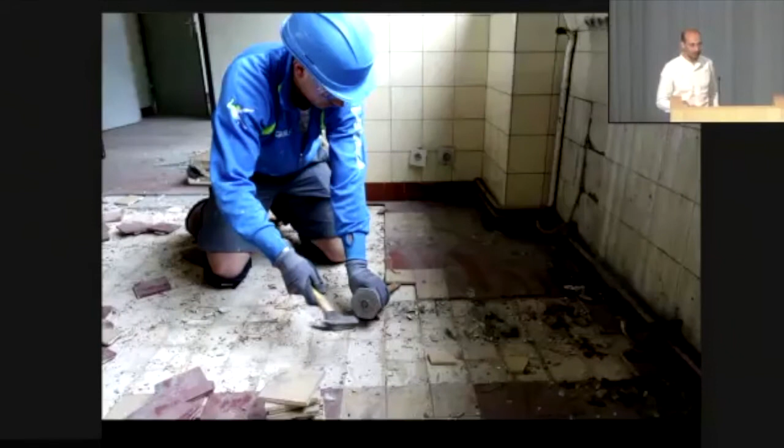What we see in the poster is ceramic tiles that have been reclaimed and reused and put into a publicly funded project of a series of apartments. That feels like something not common, not easy, challenging, and raising a lot of questions along the work Rotor is doing.

For those tiles to be in the poster means they have been reclaimed and recovered, which means a decision to collect them had to be made in this space where there is dust, there is graffiti, and decision makers had to be there, or close enough, to make that decision.

Once you take that decision, you start to collect tiles, but if you look carefully, you still have the cement mortar along the edge. You don't have a product ready to use. You just start to have something.

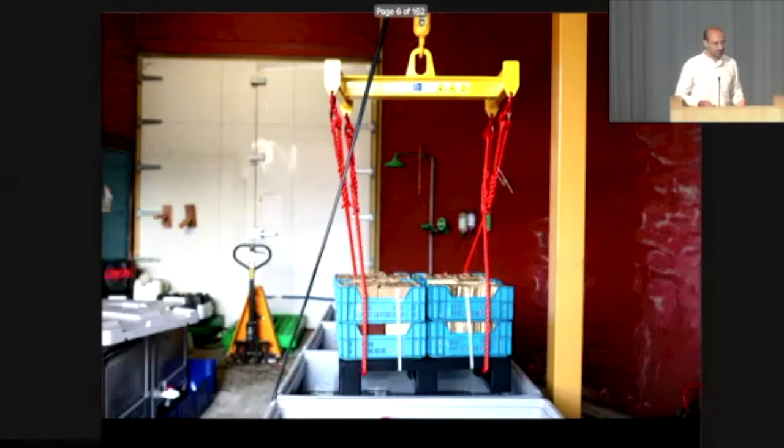The next step is a process we do at Rotor Deconstruction, but other people in the world do it too. It's basically bringing them into a bath with a soft acid, acetic acid, vinegar, which dissolves the cement. Then you clean them with high pressure water cleaning, using recycled water, by the way. But now you start to have a project.

Then it starts to be interesting. You look carefully at the product and you can recognize information — it's a Cérabati, a type of product still produced today, that has a market value. But it's also a product that comes with its own history, its own documentation, its own culture, and that starts to be something else in the process.

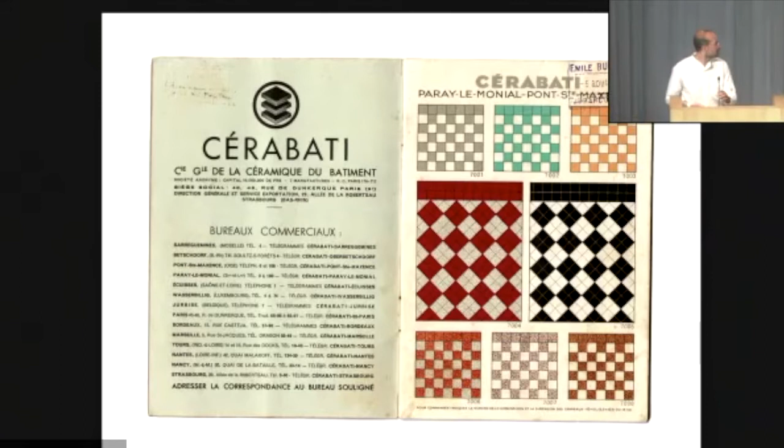That was the moment that started to be impressive and satisfying for us — it was laid and put into place in a new construction, a new project that had gone through this whole process. Maybe the feeling of scalability is part of our satisfaction. The presentation by Kerstin just showed a lot of materials that reach this same point.

And that was kind of the poster.

Maybe this echoes the work that Rotor has been doing under the umbrella of Opalis. Opalis is an inventory of the people who are already making a circulation of construction material, doing this kind of circular economy. For all of these families of material, the same story already happens. It's already there today in this world, and that was something interesting for us.

Since 2010, we started to check where and how it was already registered, inscribed in our real economy, that circular economy was happening. Because we had the feeling that even though it's not in the city center, and maybe there are small actors, they have a very huge, very real, very material expertise. There is something that is not about information, it's about the weight of architecture and materials.

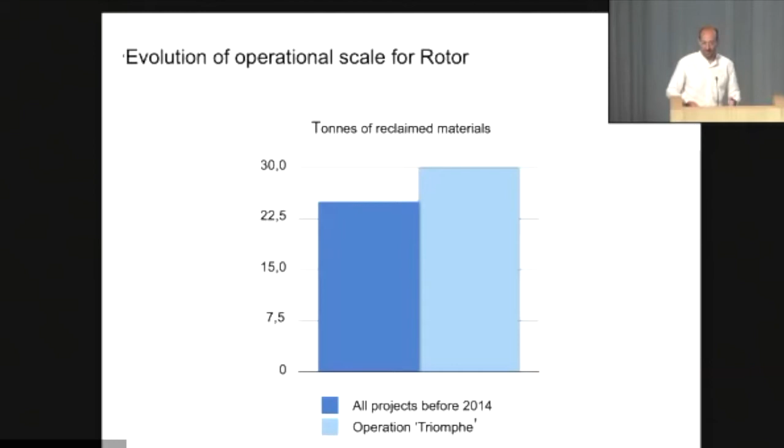The impact, as Kerstin just said, is actually significant. On this building, which was more or less our second project, we calculated the environmental impact of what we could collect, which was still the low-hanging fruit from one operation: 30 tons of materials. We used Dutch reference data at the time, since many different references are possible to use for this. At Rotor, we don't rush the translation too fast, because it's not our goal to produce a big or small number, it's just our goal to make it happen and to change things around us. The impact was equivalent to 70 square meters of photovoltaic cells over 25 years, from just one small operation in the few days before the stripping of the building.

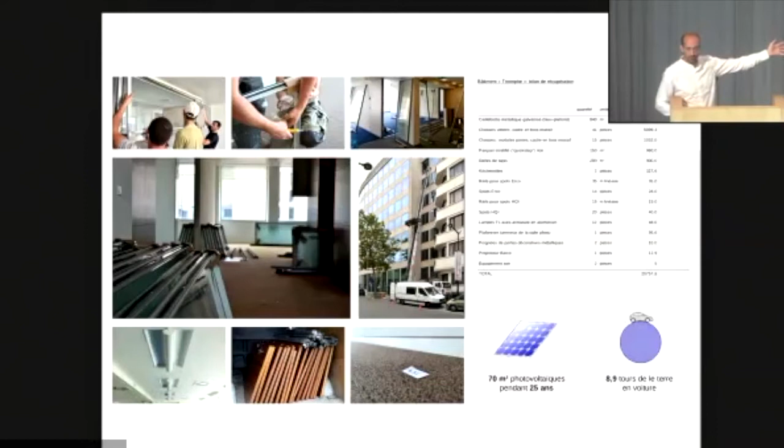When we look at it, this '25 years of photovoltaic panels' equivalent became a high point in the communication of the building owner, which is the biggest building owner in Brussels, or one of the main ones. We all know we had this communication: we have a plan for photovoltaic panels on our building over this time. And they started to understand. It's nice to see that in their communication now, they mention that following the collaboration between Befimmo and Rotor, 30 tons of building material were recuperated. As a listed company on the stock market, they need to publish an annual report every year, and we noticed that the collaboration with Rotor came before the photovoltaic discourse. Things are slowly being understood.

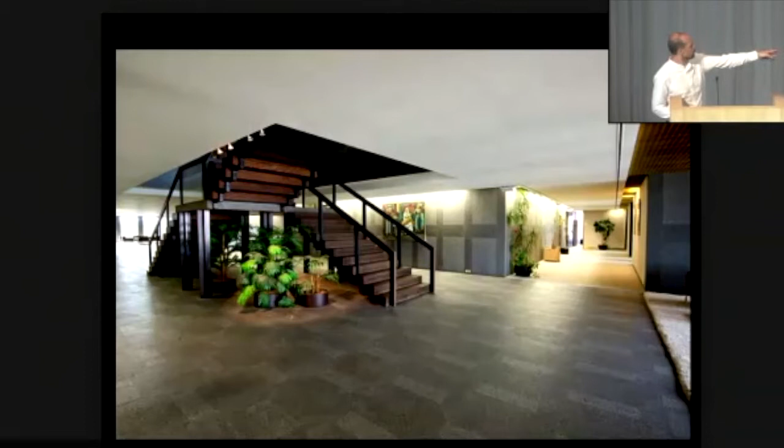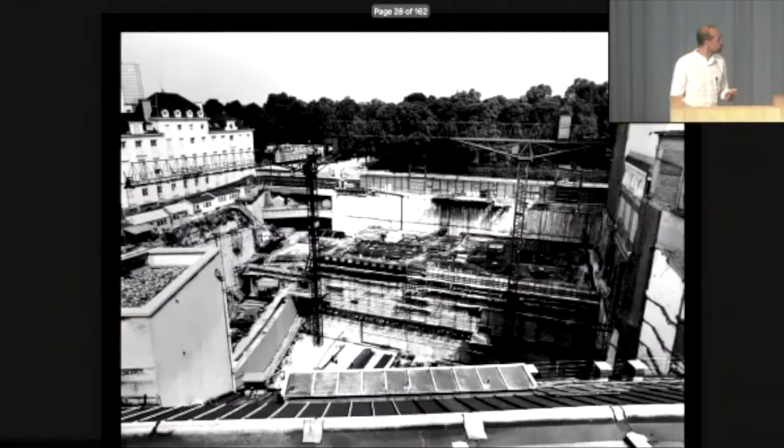Since we're speaking to architects and professionals here, I also want to say that very soon after those first operations, we were invited to assess and collect materials in a building in Brussels, the headquarters of a very prestigious bank. When you go inside, you see very beautiful granite designed by a known architect, Jules Wabbes, and precious wood on the stairs and more. You say, okay, this is definitely worth it. So we started to rent a warehouse and equip ourselves to be able to do that. There was also a beautiful false ceiling on top, and it was worth doing.

But you have to understand you don't go into that job just because it's inspiring. With this building, there are actually 6 floors below ground, a metro tunnel running at the 3rd floor below, and it's below the water level of the city. So if you make something wrong, before you know it, the pit would be full of water. You have to be able to read construction documents, do the reverse engineering, and organize with the people in charge of the operation. It really felt like high-level architectural work we were touching here, and we were very happy to have architecturally trained people surrounding us at Rotor.

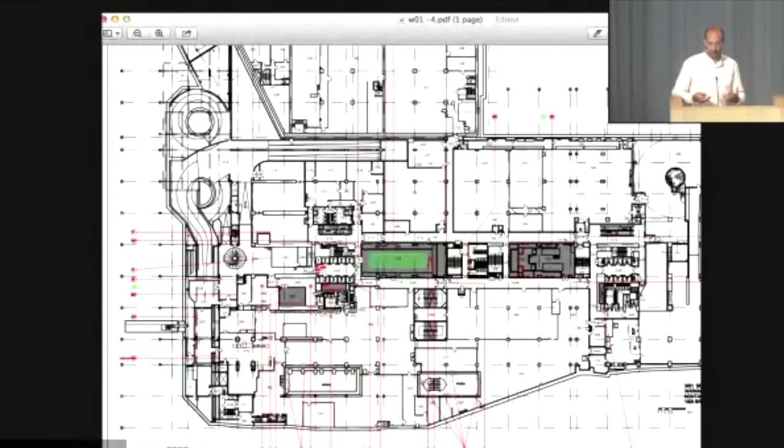You also have to be able to read the concrete quality or the load capacity of the building's floor, because when you stack the granite stone we saw before onto a pallet, you quickly have more than 500 kilograms per square meter. So you cannot just put a pile of stone on a cart and go — you have to take them 5 by 5, or choose the right path. All of this comes into the reverse engineering operation.

You also have to be competent and have the discipline to understand the risk, like asbestos marks in the construction. You want to know the safety measures and not collect materials close to a risk, because there's no interest in saving a stone at the cost of this kind of danger. It means that colleagues here at Rotor, all of them, might be giving lectures one day, in situations you wouldn't expect them to be dressed like this, but we need this kind of mindset to engage with the field. We do the job from those positions one day and from a position like today, and it implies a lot of this.

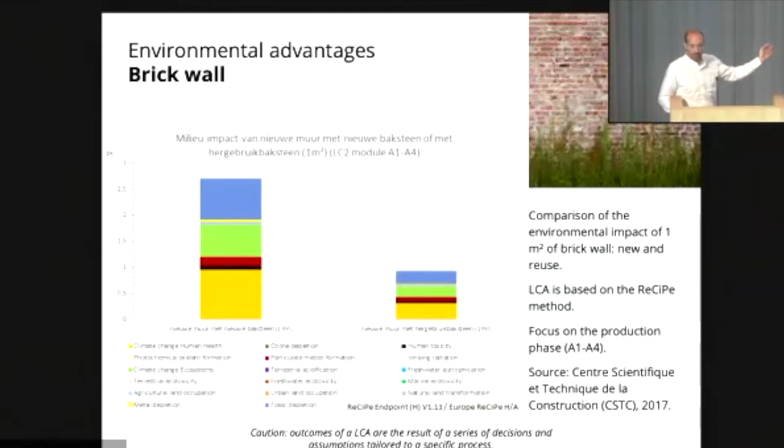All in all, the story is kind of integrated in the current narrative about circular economy. It's something that is there. We are very often invited in relation to this subject. We have a kind of table and information about the validity, the assessment of the relevance to do this for several materials.

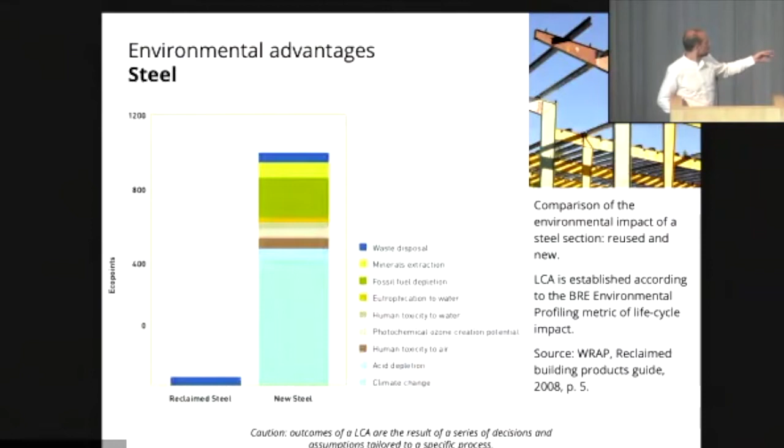For ceramic tiles, the new ones, the reused ones, for reclaimed steel, it's a huge impact. There are kinds of guides for the quick wins where you can make savings in the project. There are also informations about the distance impact in comparison to the production site of the new materials, so that you can evaluate it.

Up to that distance, it's relevant to make it with reused material, which is for aluminium extremely high. So you could take reused aluminium 12,000 kilometers away and it would still be better. And probably your new aluminium is also produced very far, so you can add that up.

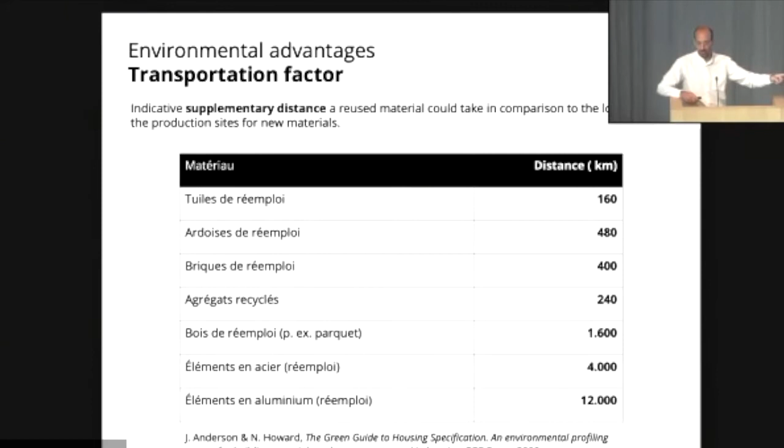And we work on that. We have a group of people, or sometimes it's the same people, but it's one branch of Rotor doing research and collecting the experience on that.

We have two documents that are at the draft version now within the FCRBE, so facilitating the recirculation of construction material. We have two guides that I will also share with you as a kind of tool, maybe for surfing around beyond the restrictions of this year.

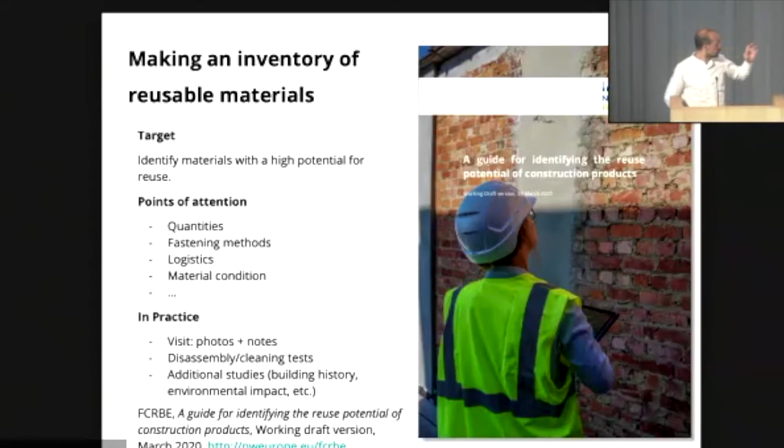One is a guide for identifying the reuse potential of construction products. It will be the final publication in a few months, but the draft is already published and available.

And we have a second guide that was done over the last three years for facilitating the integration of reclaimed building materials in large-scale projects and public tenders. So it covers strategies, approaches, problems that are raised, and for which ones there are strategies or possibilities.

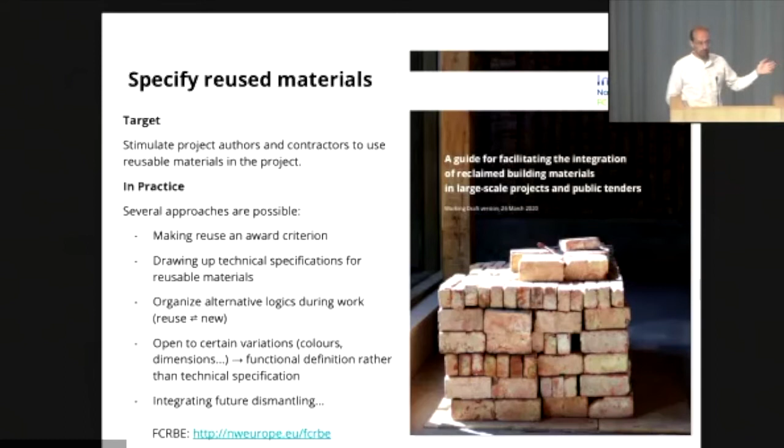And I invite you to look at the circulation of construction material, maybe through those tools and all what the school will give you along this year.

At the same time, we are engaged with this question since 2005. I was professionally engaged with the question since 2010, but we also have constantly and very precisely a critical perspective on the circulation of material and the questions that come.

Two years ago, I think some colleagues made a small exhibition in Brussels called Life Under a Cherry Tree. And in that exhibition, they brought together a collection of building materials that strongly resist reuse.

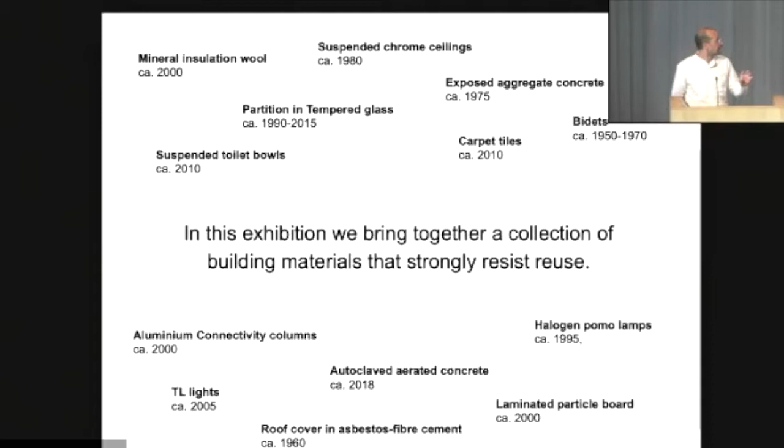You had this postmodern lamp with halogen, and they don't resist reuse because they are difficult to dismantle. They resist reuse because there is no market, there is no demand, there is the relamping or the technology that has changed for the real better at the moment.

Or we have the roof cover in cement asbestos, and the asbestos is captured, but there is every good reason to not reuse it at the moment.

The glass panel in office partition walls, we tried. We are very happy when we see now the manufacturer also trying, but it doesn't reach market competitivity. The fiberboard melaminated panel also, it's very easy to take, but it doesn't reach marketability.

And the exhibition was completed with these families of concrete tiles or some kind of insulation and carpet that resist reuse. Toilet bowls or these technical columns, they are there.

We also highlighted in the exhibition a quote from an architect in 2005, a Belgian architect who is the author of many of the projects in which we've been collecting materials. And we were surprised or impressed to see that in a professional journal he was writing.

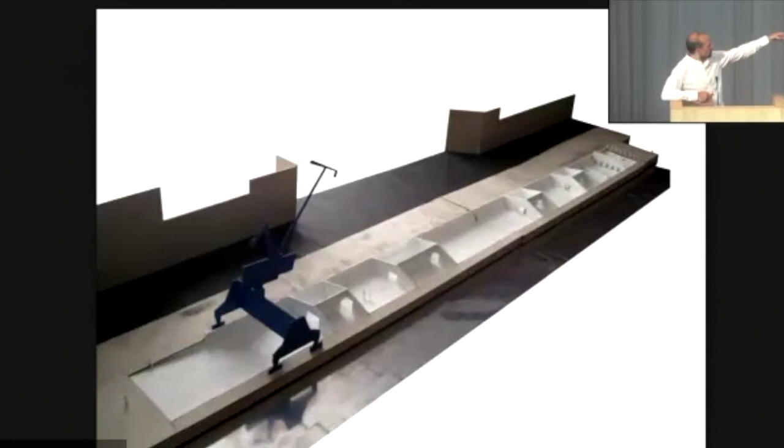The first project is the story of the project Grindbakken. Grindbakken is an infrastructure in Ghent, a small city in Belgium, and they opened a competition to repurpose an infrastructure along the canals that used to be serving the concrete industry. Basically, it was to collect the sand and the grain and the gravel from the boat and then to load the trucks.

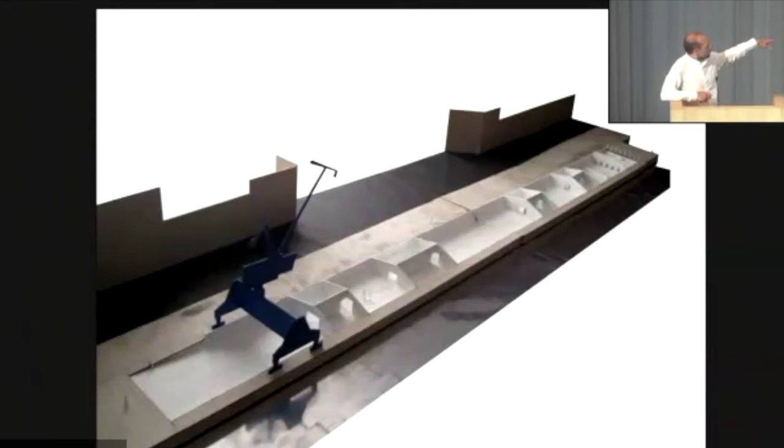A young designer, a young artist, and a young architect won the competition, and they proposed to have it widened, to make openings, to provide some service like electricity and water, and to have it as a public space, a new beginning or new something fresh.

And then they called us and said, oh Rotor, would you like to be the first to do an installation there? We have a small budget for that. And we had the feeling, maybe we are wrong, I don't know if we checked if this feeling was the appropriate one, but we had the feeling you will build something there with reused material, so it's not too much guilty.

We were not inspired by that. We felt like that's not enough of a reason. But after opening the mail, we looked at Google Earth and we started to see what was the situation there before they started to do the repurposing, the reconstruction work.

Said, interesting. So we went, because it's not that far, 3 colleagues of us, Tristan, myself, and Lionel, at the first day. And we looked, one was filled. Yeah, it was starting to be inspiring. And actually Lionel, which is one of our colleagues, is a bioengineer by training.

He started to look at the lichens. And he said, Renaud, Tristan, come, basically I recognize this one. If with a little bit of search I could tell you when the first Chinese boat came here, because it's this mushroom and this bacteria, and they go this speed, and I know this. And we were like, this is so cool.

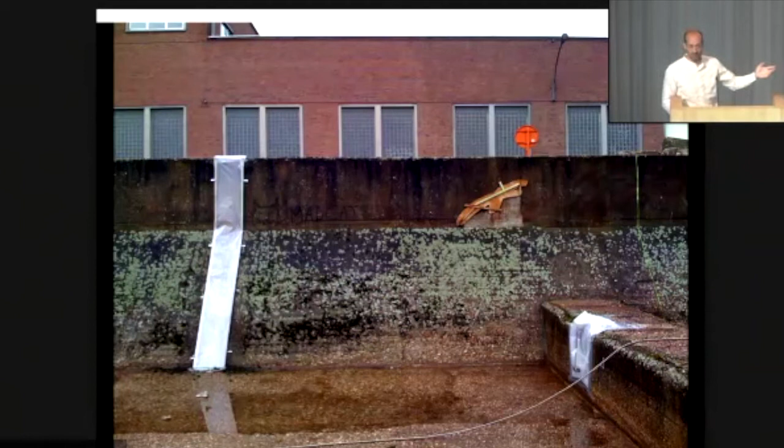And of course, when you want to paint white a concrete like this, you have to do a high pressure sand cleaning, so it's quite aggressive, then spray paint. So we had to make very tight enclosures to protect the qualities. Of course you didn't want to have drilling on the thing you will display, because you care for what you display. That was the challenge, and that's how we spent the budget.

And of course this one was just beautiful because the water had been moving there. So there was a collection of graffiti that was kind of curated.

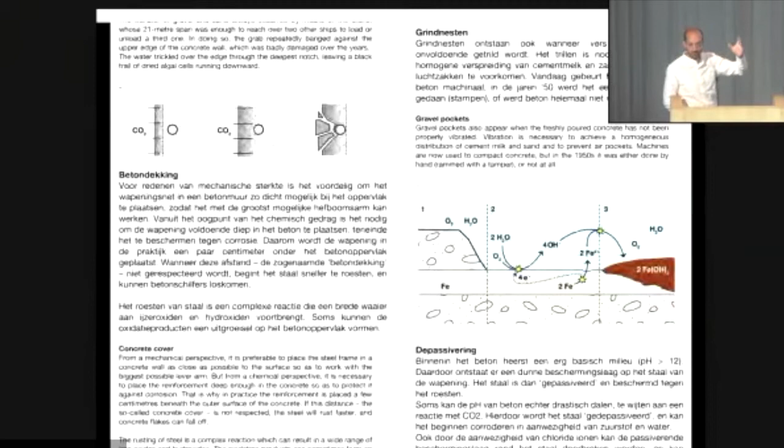This room we used to explain the story of the concrete and the submerged concrete. So we went and engaged with the people at the university, and we made a very clear explanation about this process of corrosion for the public who would visit the space.

And that's what it became, and it creates this kind of space. When the work was done, of course the trace of pouring the concrete was highlighted here. I turned the presentation about the concrete today because of the title. There could have been others.

We really like this kind of moment that we created for the opening, having this lady looking at the explanation on the spray can and the spray brand they use for graffiti, with other people. Suddenly we felt able to create something that we would not have the skills or tools to do with any new or not new materials.

Okay, I'll go to another story. This is the building here. It's owned by the family of Galeries Lafayette in Paris, nearby the Centre Pompidou in the Marais, in the center. They decided to turn this building into their own art foundation, and they called us.

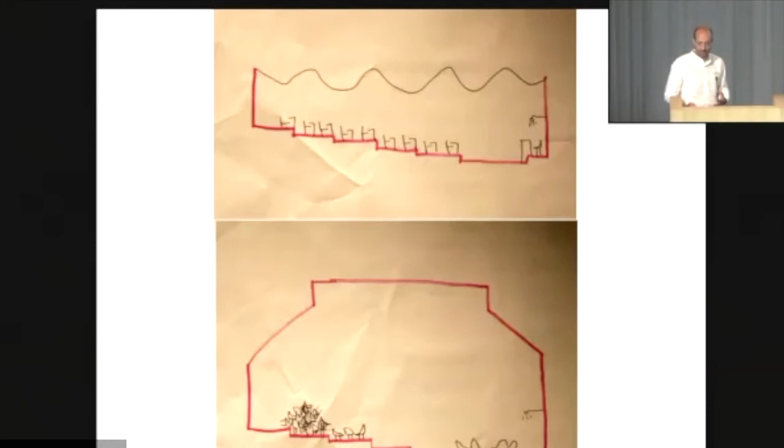So the work was to just work on the connotation. We decided we would remove the previous connotation, the weight of the previous usage when it's a bad connotation—not the materiality itself is a problem for us. And so the first day we started with this room.

That was one level that was used to train the people from the Bon Marché, which is a department store a few streets from there. It feels like a 90s office space. We said, okay, actually it's the age where they were putting false ceilings to cut the windows because of comfort, modernity, but also the heating preoccupation. But as a creative space, it doesn't need to be that.

And we said, okay, we will just shift, recover the level, and the space will be something completely different. And actually, many people liked the space just after that.

And another one, it was the first floor, this series of auditoriums. We said, okay, if we are proposing to invite creative people, there will be moments of display, a larger space would be nice. We said we will remove all the walls here. But then we suddenly understood that if we remove all the walls, we have no furniture—there is no budget to build anything, to add something.

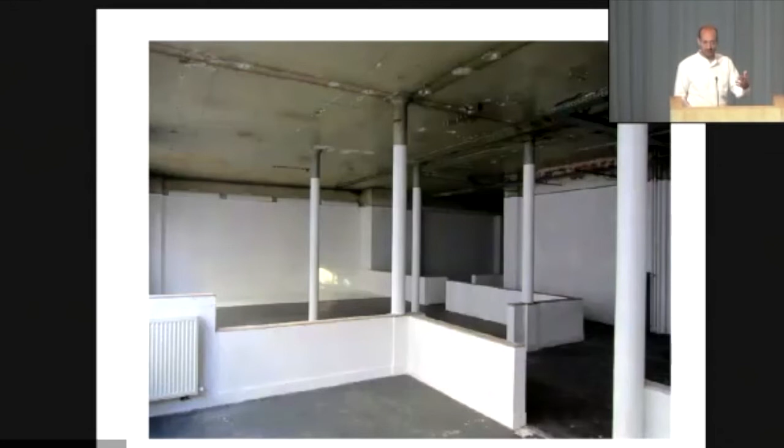And indeed we cut—the wall was a kind of particle board with holes, double level, it was not very stable. So we used the quick step, the plastic flooring system of the director's office, to make a formwork, and we poured a bit of concrete to have an edge. We added a little bit of concrete here, and we chose to paint one layer of white on the vertical surface, so that in photo it looks white. When you were on site, it was not perfect white, but on photo, if you display something and capture the image, you have something proper.

And so that was the space. And of course, it happened what needed to happen—there were not enough chairs, and it became the furniture of the project.

The third room in that project was on the third floor. It felt like the most comfortable room—that's where they wanted us to do a scenography. We had the impression it was the office space of Mode magazine, a French fashion magazine. So it was refreshed, white and black, halogen, false ceiling. It felt like, okay, very 2000s, almost okay—it was just okay for them to invite their guests there.

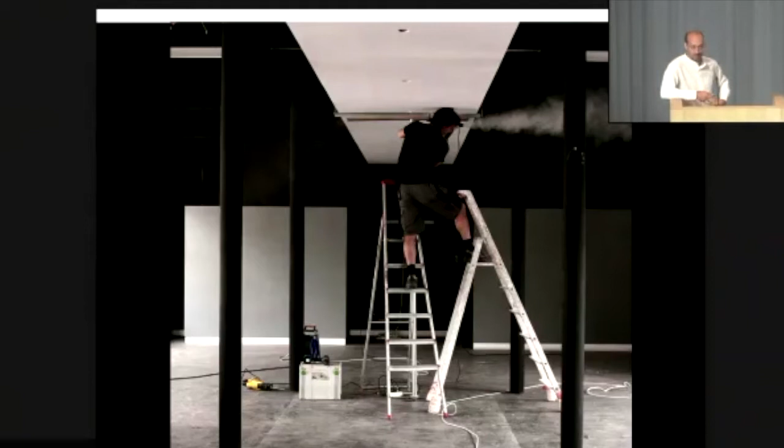We looked at it from the top, and we saw that there was a kind of galvanized little I-beam structure, very fragile, like just for plasterboard, but it was the only structural element we would be able to reshuffle in the project if we need it. So we cut it and dismantled it slowly.

And we said, okay, let's keep with it. It stayed on the wall for a long time, but at the end of the 20 days, we were thinking these people, they are in Paris, they speak about inviting 40 people, but it's not easy to have a dinner with 40 people in Paris. Almost architecturally, there isn't much space where you can have a dinner for 40 people.

And we said, let's take the plasterboard ceiling, turn it upside down and make a table so that we can have dinner very easily with 40 people. Of course, it's a double sheet of plaster—the cheapest material, or the least fitting material for doing a table. So we added some layers of boat varnish that's quite hard, and it became the table. We made some lighting.

And of course, it was the starting point for them to enjoy the project, and they made a lot of dinners, and there is a lot of the family of the Galeries Lafayette here, and it happened a lot. What is nice is that actually they liked this period.

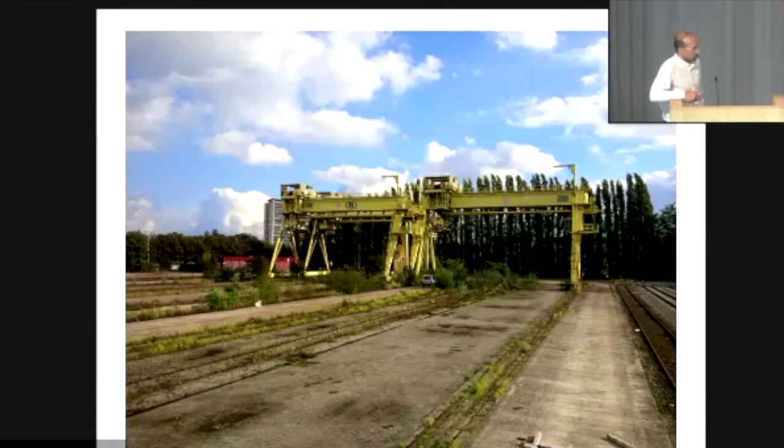I'll go to another story. This is a project that was made by Tristan and colleagues, but I will try to tell it the way he told it to me.

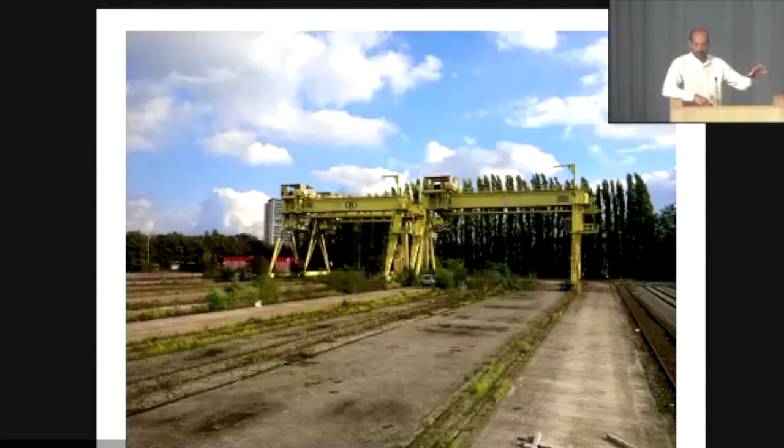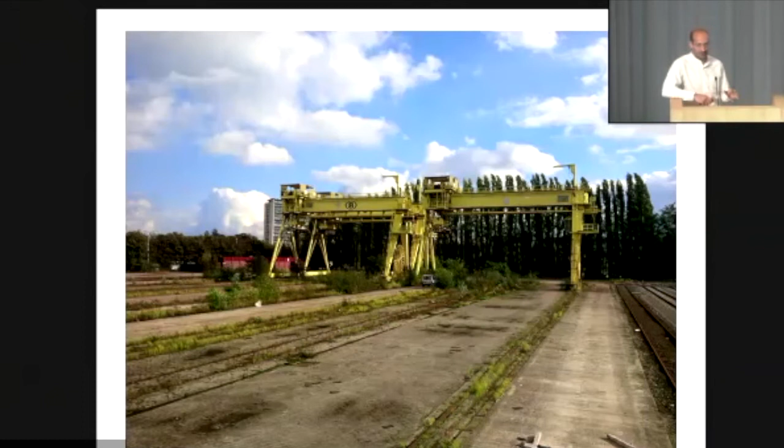It's in Antwerp, in Belgium, and there is a huge event hall, a sports palace, where they make big concerts—Madonna would come—or there's also tennis competitions. It's one of the big event halls in Belgium, and they need to rebuild a new parking. So for 8 years there's been no parking space along the facility, and they asked the train station if they could use this piece of land along the train and turn it into a long-term temporary parking.

It was commissioned as a design-and-build to a technical office that had to design and build the parking. But in many publicly funded projects there's this 1% artistic commission that needs to be integrated. The team in charge of the project were wise and aware of the work we do, and they called us and said, can we ask you to do the 1% work? And we said, let's think about it.

We suggested the commission be a kind of poster at the entrance of the site that says it's a parking—that's the story of the place. But we would engage with them in the conception process in a way that what we show in the drawing is something we think is worth it. So we weren't doing the drawing for the drawing's sake, we were doing it as a pretext to engage in the design process.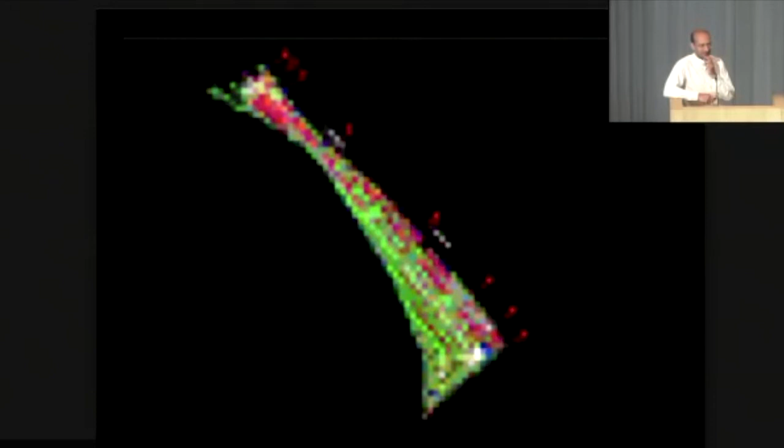When you start to work with them, that's the kind of definition and document they use in the technical office. I think Axel also gives very beautiful lectures when he can speak this way—actually they prefer to talk this way, with the Excel sheet, rather than through drawings or presentations.

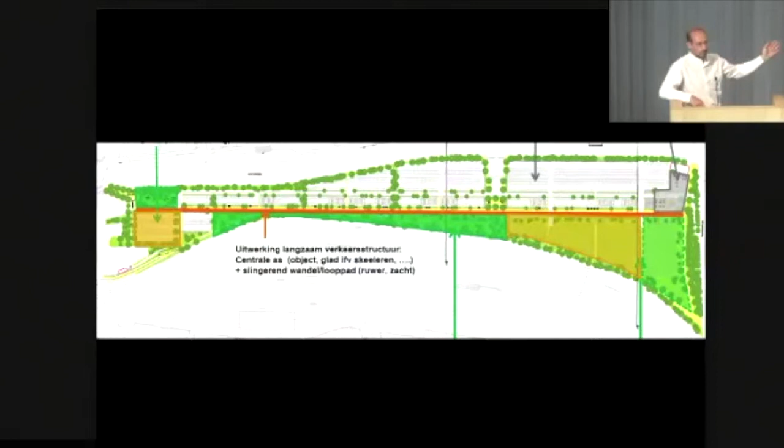If you push them, there was a kind of plan like this for the amount of parking they need, and a lot of greenery, which is a kind of fantasy because over 8 years there will not be green. But the work of my colleagues was to engage with them and apply the thinking process. Okay, you want to do a parking. Can we talk about this parking need in a dynamic vision, not in a static vision?

You don't need to park the full number, we'll have it on the next slide. You don't have Madonna coming every day. Some days there's only a partial use of the space. So let's say at the entrance you need always people walking, at least that amount of car. Then you need sometimes more, and sometimes you need it all. Can we talk this way? Okay, that's the plan of the amount of parking you have in your design.

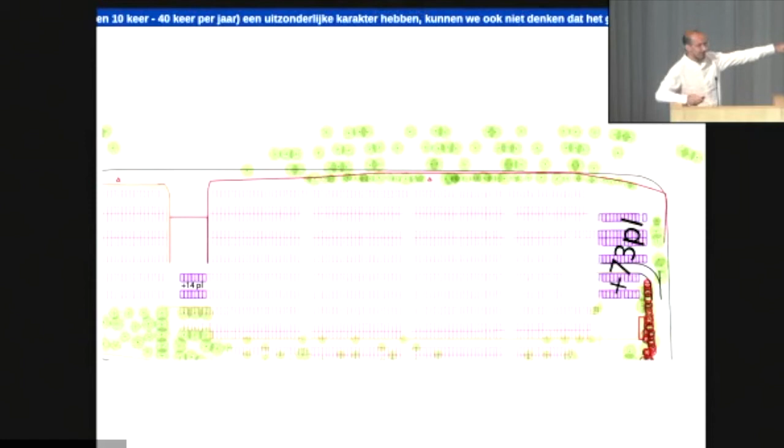And then we play their game, which is we look and revisit their own arguments. Oh, you lost some things. There is a potential for 14 more spaces here, and there's also the possibility to do 73 more. But then we have an agenda. So can we talk about this 565 places in the dynamic, with more openness? And that's about what it is to build a relation with people. Our idea was to have a mineral and a green division of the site along this spine.

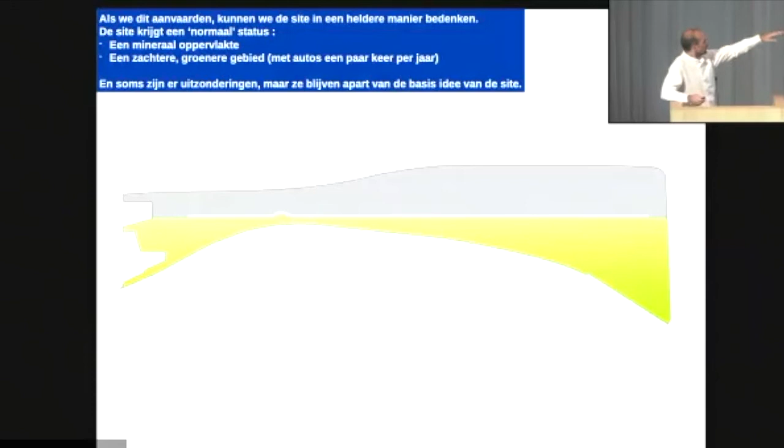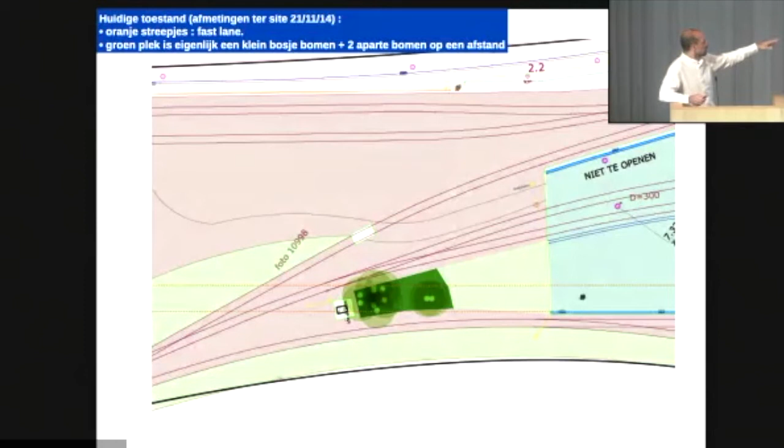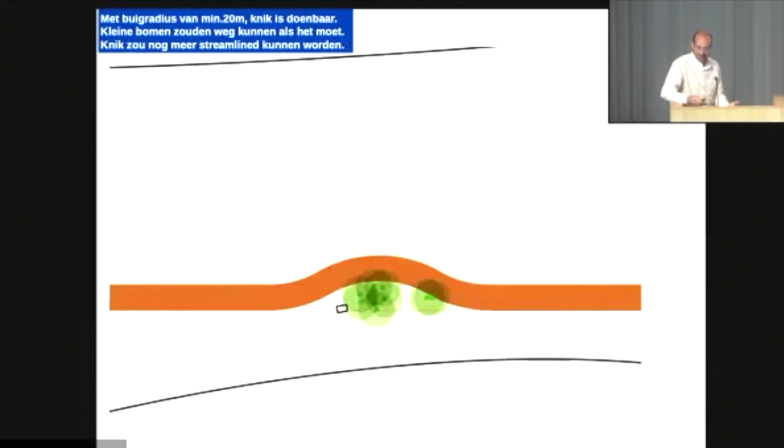So next thing, there are just 3 little trees on the site, but they tell us, oh no, it's exactly on the line. If we don't want to lose too many cars, they will need to be demolished. It's not an option. And so Tristan comes very proudly and says, actually, I've calculated with a radius of 20 meters the cars can turn along the street. Can we implement that in the project? But it seems they need someone to care enough to do this exercise and to do it.

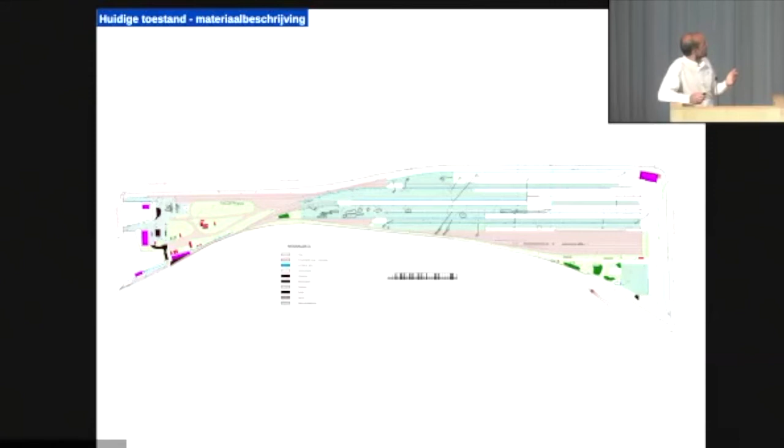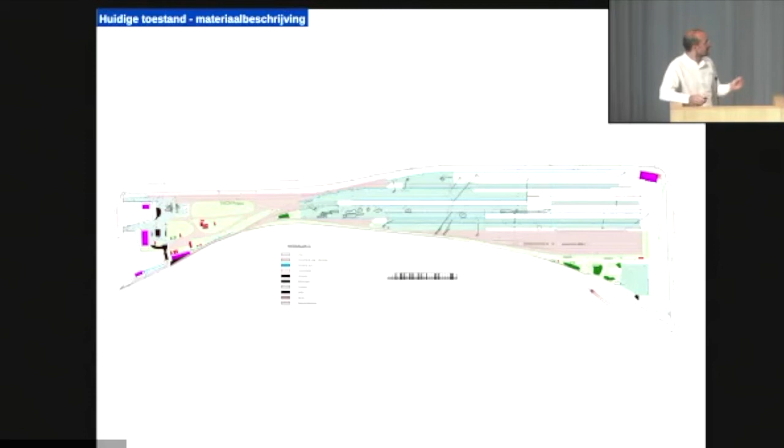And then for us, it was an exercise of looking at the materiality, looking at what is there on the site. There was a relevé. It's not a tabula rasa, it's not empty. There is specific and precisely describable material on the site. And so that was the next level of engagement with the site.

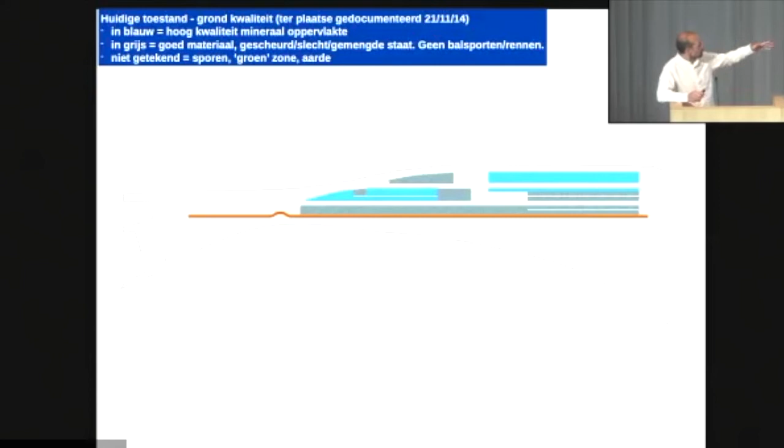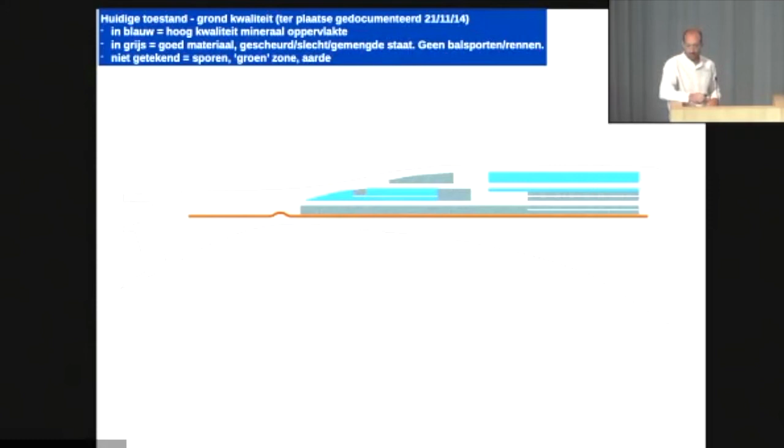And we start to look, okay, there are some materials that have, in blue, very high quality. The finishing is flat, it's good, it's strong. There are some materials that have medium quality, and then some material that has kind of low quality or no quality, and we can understand that in the Excel sheet as an amount to be processed through the business as usual. And then we put a focus: can we talk about those 2 areas that have high quality, and appreciate the quality they have?

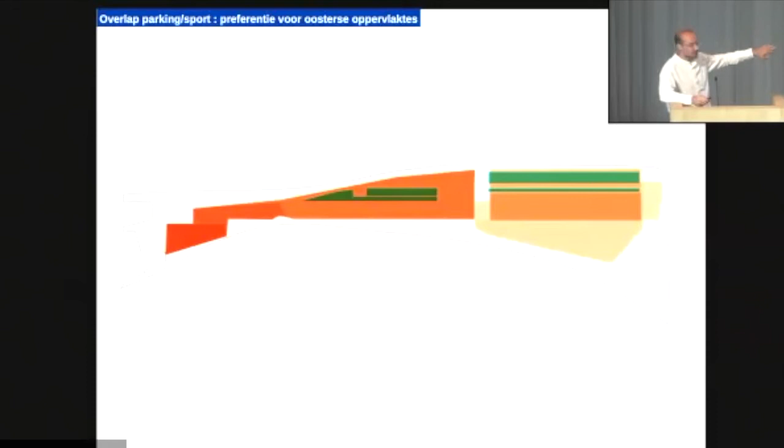Then we mix with the dynamic version. Okay, let's forget about the one that's in dark orange, but can we be active about this? And then it's been turned into, could we add a sport facility into the area? And we put a fencing system that makes it closed and protected if you don't need full capacity, so you don't have randomly a car coming and blocking this surface. But if you need, we open it, and the basketball field is not available for tonight. And they agreed. So we started to have a project.

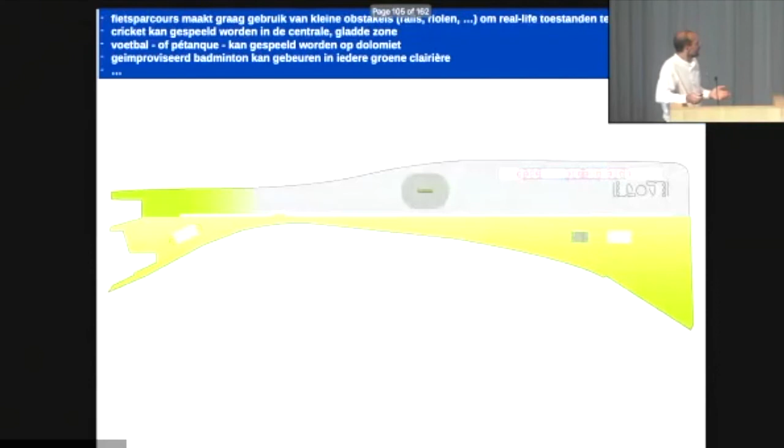A next step for the understanding of the multi-dimension of the project. On that side of the area, there were housing blocks, social housing blocks, with a significant quantity of people who'd been using the site by trespassing before. And we were thinking, they have children, they need to go to the playground or to play in the green every day. Even if Madonna is there, you can cut the basketball, but there are people, there are children who need to go.

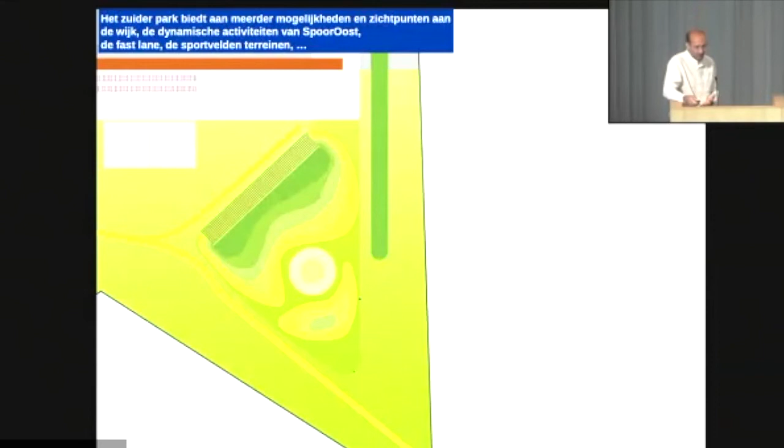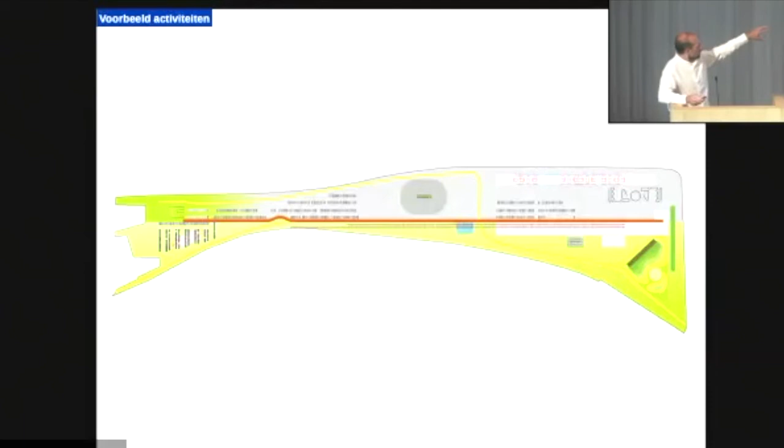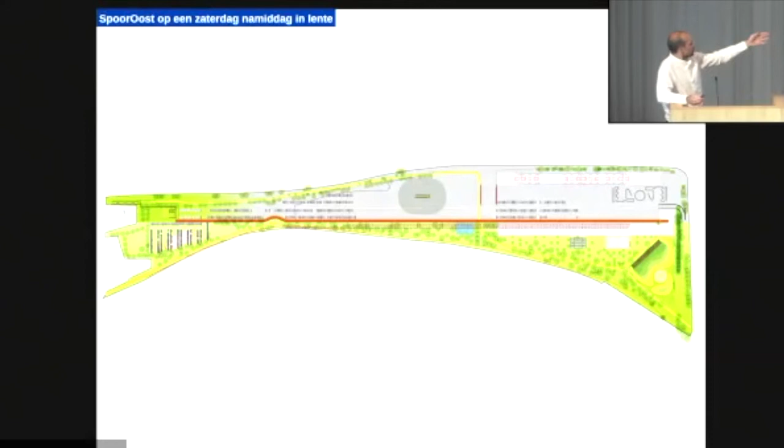So there was a project to put something, and then asking them to modify the land in a way that this area could be protected from the site and could be a real dedication to a specific need and a specific opportunity from the project. And so we start to have the design of the project with an area dedicated to its own time frame, but on that zone. And then the project has a potential for maybe a little bit of green, but we know where and how it builds up into something, not randomly dispersing green. And they did it, it happened. So that was the project.

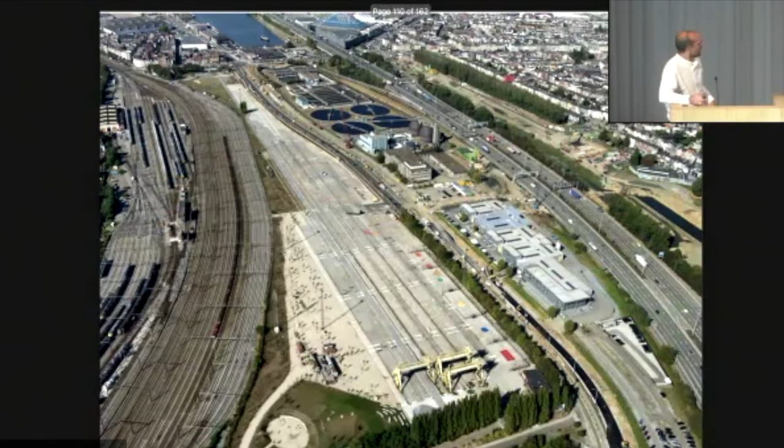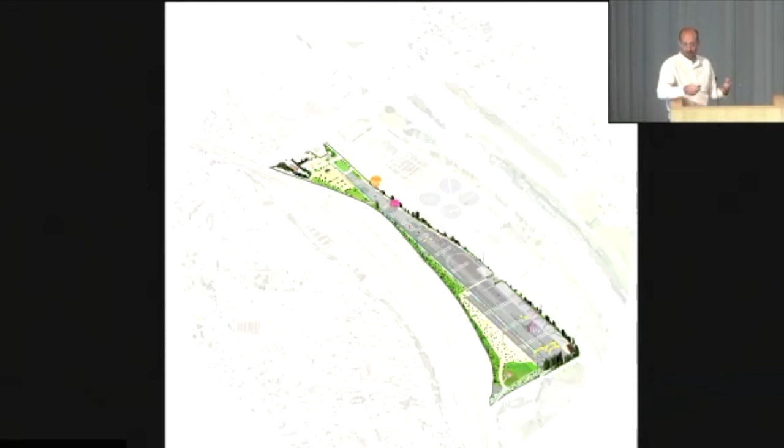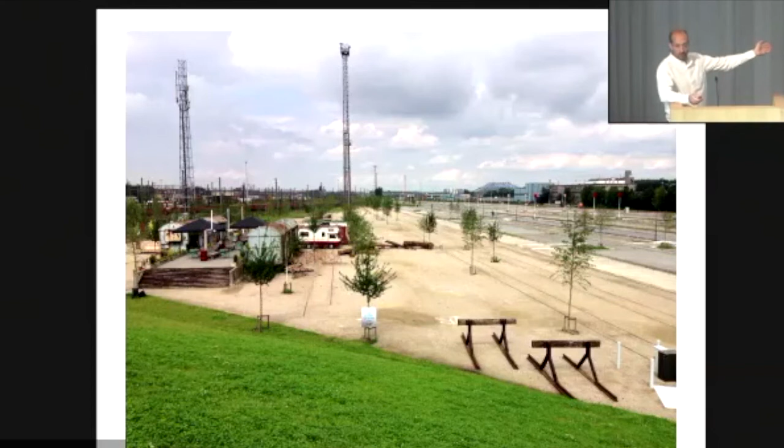And so Rotor did its part of the job, which was doing a painting that represents a welcoming park that is shared with the community, along being a temporary parking for the facility. And the result has been this kind of thing happening on the site - this area that is ready to park more people, but that feels less like a priority to put cars on it.

The 1 kilometer line exists and is an attraction or a quality of the site. Like we see, the trees have been saved.

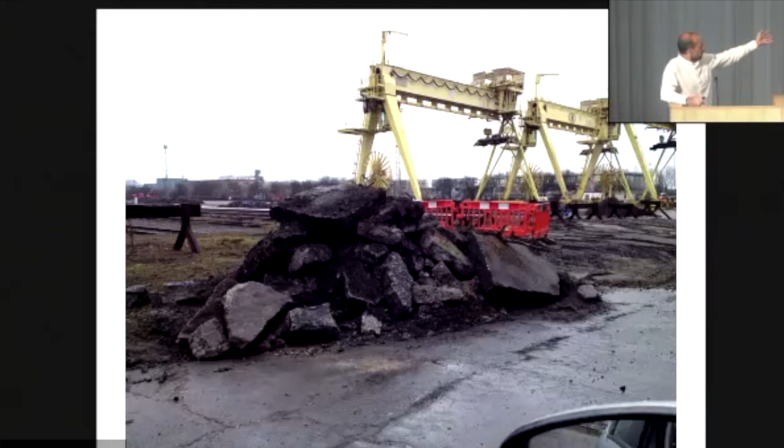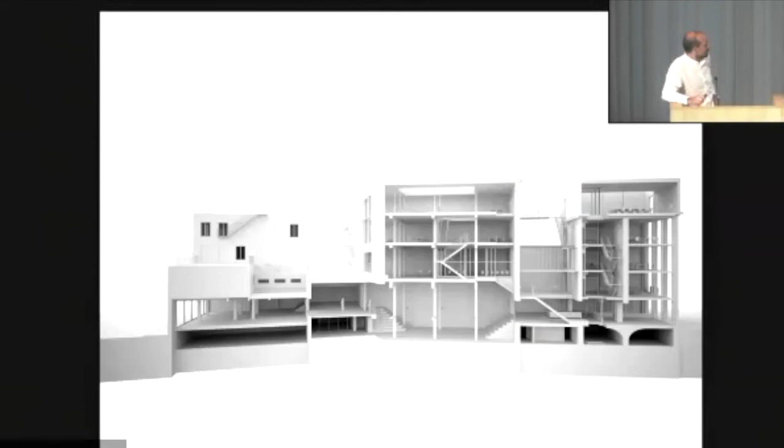Okay, I go to another story. This is the model of the building for the Design and Mode Center in Brussels. It's an architectural competition that we won with the Architect Office V+, to make a new center for the mode and design in the city center.

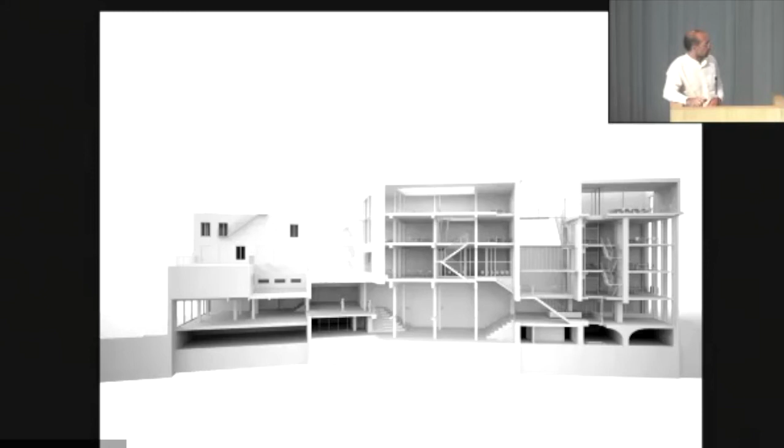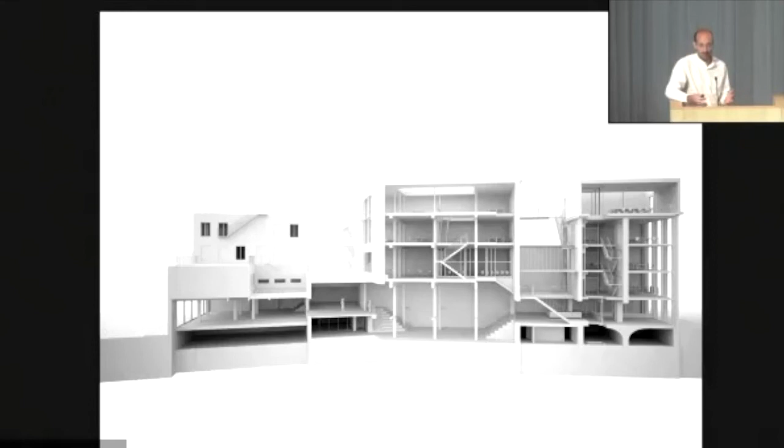The competition called for demolition of the building and for the production of a new architectural object that was worth the representation of design and mode in Brussels. And somehow, if you think properly, there was a €6 million budget. It's not a huge budget. It will not be an amazing object of architecture. It will not be an amazing icon that is worth itself in itself. It will be a construction and a little bit of iconicity.

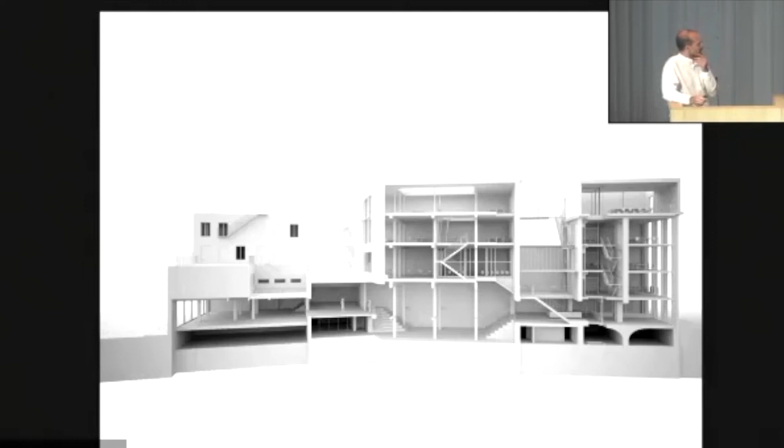So we proposed to enter the competition with the idea that we will keep the 3 existing buildings. They are not special, they are not fancy. We will just make small modifications into it, but we took them at their own game, and we said, as a museum, you are kind of in the business of the white box. You are dealing with the white box, but from our perspective as people with care for material and materiality, we know that there is no such thing as the abstract white box. It's white plaster, it's with the scratch or the bump of the people who set up the room.

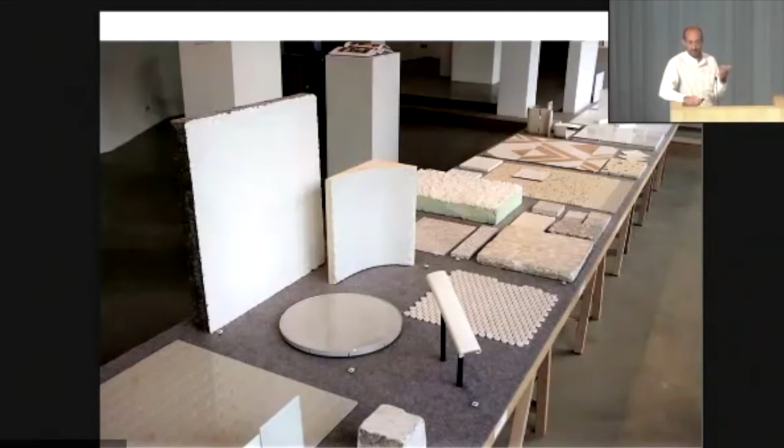And so we said, we will deliver and we will offer an iconicity to this building by retrofitting, by filling it with a very rich and very large collection of white and white texture. And so we appreciate and we recognize and we made the statement that white is not an idea, an abstract idea - white is material, and materials are specific things. And we made the job by calling every company to have the sample of the white sample of their production.

That has been the catalog of material that we use to remake the building. There was no opening for reuse material, but that was not the point for us. It was about, of course, reusing the building, but also to solve the problem that was implied by the commission of the competition through material in a sensible way.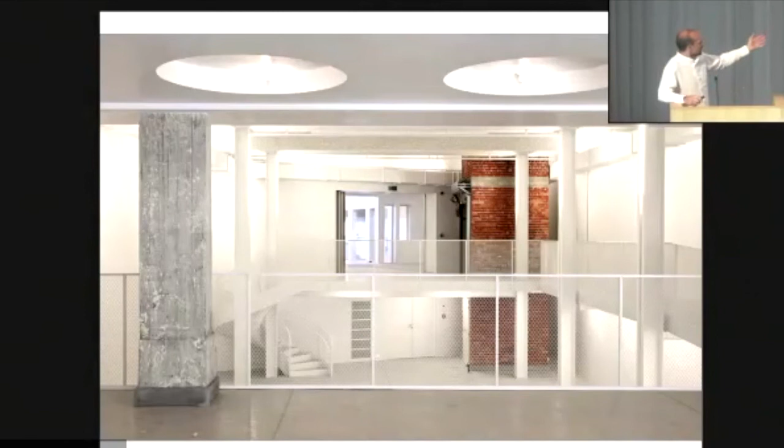And so the facade is the same as the original. We just took the white panel of the glass filling - there was a little extension. And inside, we use white flock, white paint, white everything, and we kept the color of the existing material. And in between the two buildings, it became a space, also again using the white, and the reflection of white kind of is a white, and so on - that's what the building is.

And I will take a last story. Maybe it's a bit taking us away from the field of architecture, but actually I'm happy to explain the story because we felt confident about doing that project or supporting this project in the office. It's mostly Lionel Devlieger who wrote and led that project. But the story is about what's eating the Chinese mitten crab, and who's eating the Chinese mitten crab.

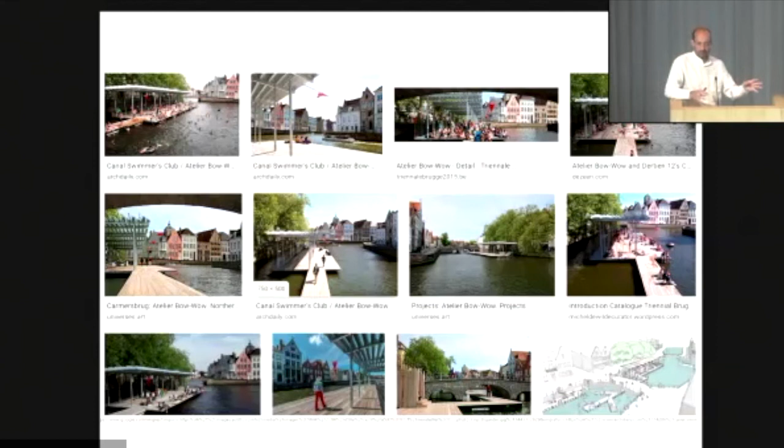We've been invited to do a contribution to the Bruges Triennale of Art and Architecture. We started, like you could expect from a Rotor perspective, remembering that three years ago Bow-Wow made a pavilion, and we knew the material had been collected. So let's explore what materials have been collected.

Let's ask. When we called the guy who had done the demounting, and he explained about the material from the Bow-Wow pavilion, he told us: you know what was very special or exceptional when we demounted this pavilion? Actually, it was the crabs. The crabs were all around, in between.

Actually, the waters of Bruges are invaded by crabs, and when it's their time, they climb on the building. And the story suddenly became much more impressive than the collection of material saved from the Bow-Wow pavilion.

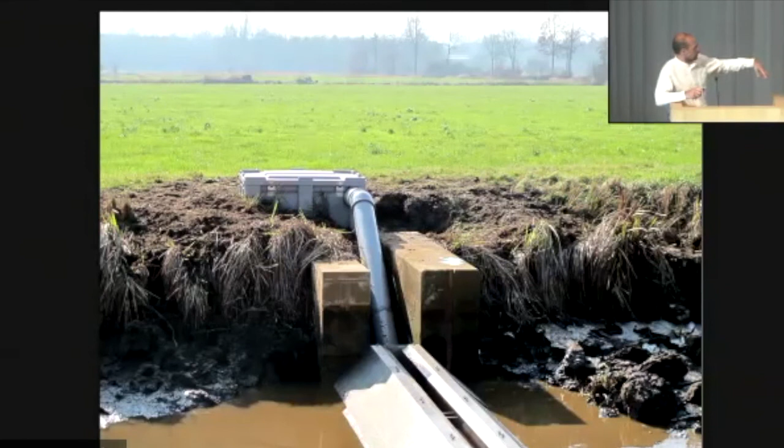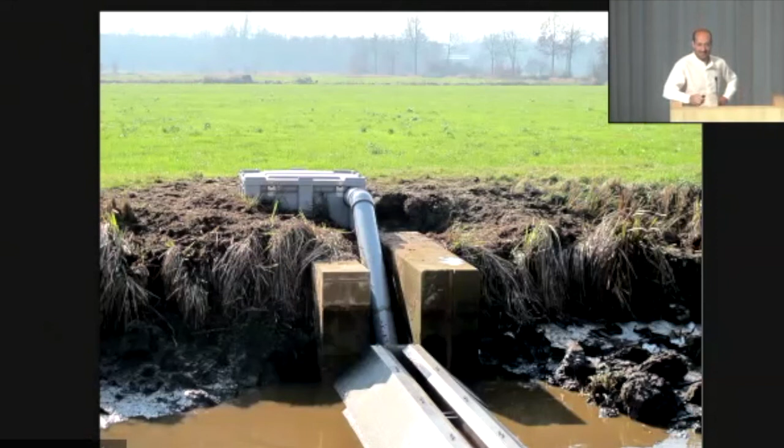They explained that the authorities put traps in the river along Bruges to capture the crabs when they climb, and they are taken and burned in a cement oven because you need to remove them. We were like, this is starting to be a story. So that became the project.

We will talk about those crabs, and do a contribution to the architecture field and discipline through them. So at Rotor, we invited the crabs into the office. We lived with them. They had a photo shoot on the dining table.

Sébastien, one of the colleagues who happens to be an oceanographer by training, was very happy to use his skills in the office. The model table at the office was set up to capture this.

It's a kind of boat that traveled between China and Belgium, but they used to carry water in their belly for stabilization, and they dropped that water on the other side. That's the beginning of the invasion of the species.

We can see that in 1912, the first Chinese mitten crabs are found in Germany, and 1901 is the time of the boat that came. So there is an investigation that kind of makes sense.